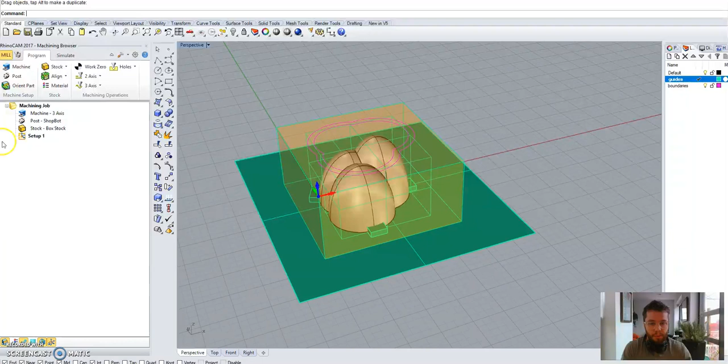You can see how it could quickly get quite complicated in a bigger model with more parts that are separated on a sheet. Just know that being methodical about this, having your bounding boxes and your guides and your tabs all nicely put into place is going to save you a lot of time and a lot of heartache down the line. The CNC is something where you can easily halve the time of a job just by setting it up correctly.

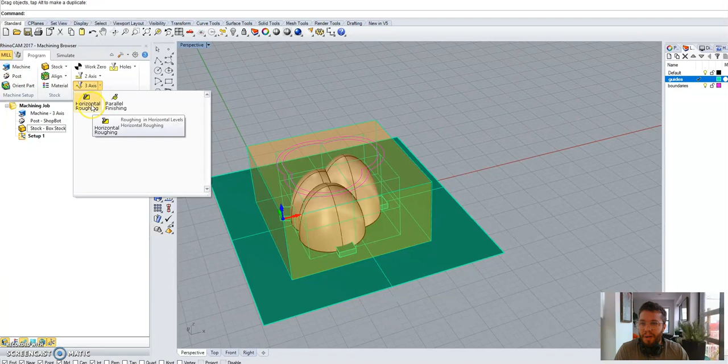Okay, so we've seen the 2-axis operations before. We were picking profiling last time. Now we're going to go into 3-axis. And I only have 2 here. Yours is going to look a little bit different than this. Horizontal roughing is the one that we're going to start with. So the window looks much the same. I'm using RhinoCAM 2017 here. You might have 2018. They're basically the same.

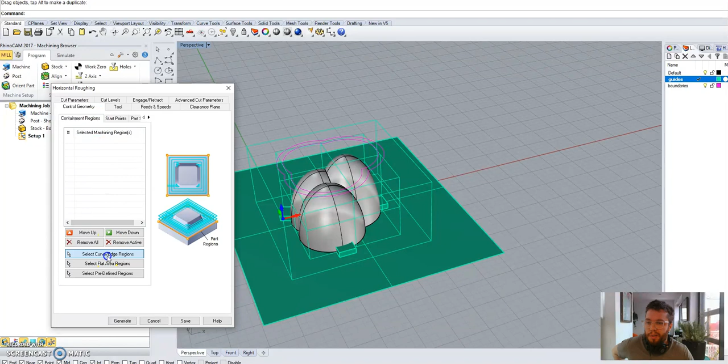We're just going to go through tab by tab really quickly and set this up. I'm going to hesitate a little bit on the things that are different from the 2D, but I think you'll find that this is actually simpler. So for control geometry, or in this case it's called containment regions, I'm going to select that offset perimeter curve. And that's it. You don't have to do anything with the geometry itself. You're just telling it what to cut inside, and it looks down, sees it, and tries to cut it.

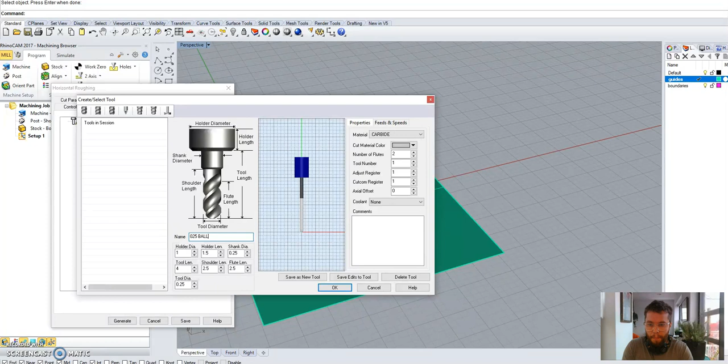Tool, we're going to use the same diameter tool as last time, but this time use a ball tool. The ball tool is much better at shaping 3-dimensional objects. The compromise that you get with the ball tool is that it will leave tiny ridges behind in between your tool paths. 0.25 ball. Save as new tool.

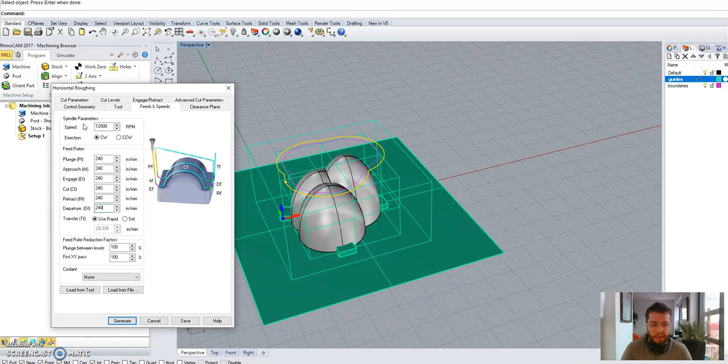OK. Feeds and speeds. We're working with foam, which is the most forgiving substance of all, other than marshmallow. 12,000 for the spindle speed. And I'm just going to use the same 240 plywood speeds from before. Foam is more forgiving than plywood, but it's a small object, and as a starting point, I'm just going to use that same number for reference.

Check that your clearance plane is in the right place. It should be in this file because it's clean. There's no stray geometry anywhere. Cut parameters is when it gets a little bit different. So it looks sort of similar to the profiling operation, except that there is this option for step over distance. This is the only thing in this window in 99% of cases that we're concerned with.

So the step over distance is the distance that the tool is going to move sideways while it's trying to clear out all the material from a single level of your model. It's kind of going to make a Zen rock garden pattern as it does it, but you have to tell it how much to step over. Like with step down, like we talked about last time, 50% of the tool diameter is a good starting point. You can be more aggressive with foam. You'll have to be actually gentler with other materials. But always start there, see how long your file is going to take, and then if you decide that you can be a little bit more aggressive, then do that.

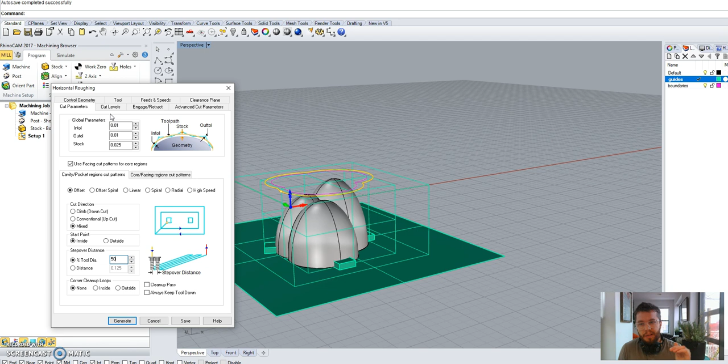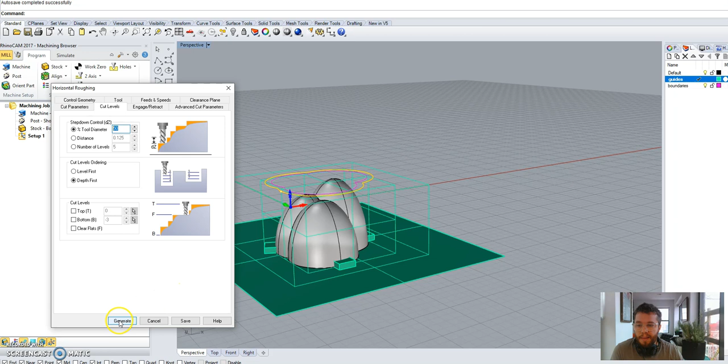Let's go to cut levels. Different from cut levels in 2D, where it asked you what the total cut depth was and then asked you for a rough or finish pass to determine the step down, this asks you explicitly what you want the step down to be in terms of tool diameter. Default is 50%. That's our sort of default rule of thumb. So that's good. And that, my friends, is it.

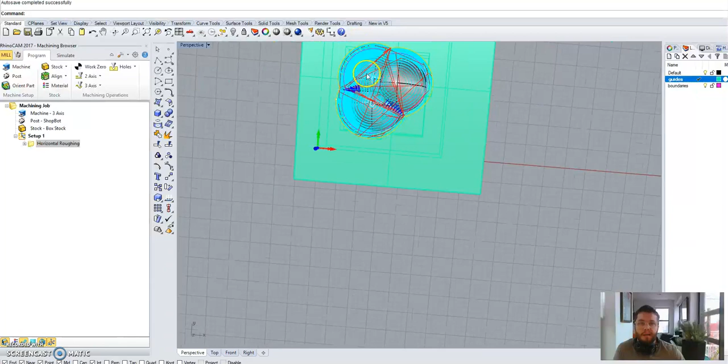It should take a minute, if it's a large file, to generate the preview. But what you're looking for is to see that you're making a lot of passes. They should be stepping down in section. They should be making this sort of concentric Zen pattern in plan. And they should be contained to the region that you've told it to contain them to.

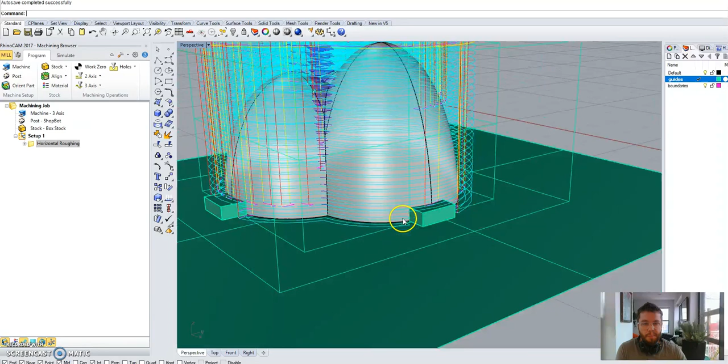Notice that it is not cutting out these tabs. That toolpath is going and stopping before it gets to the tab. It's leaving the tab behind. It considers the tab a part of your model. That's why it's not cutting it.